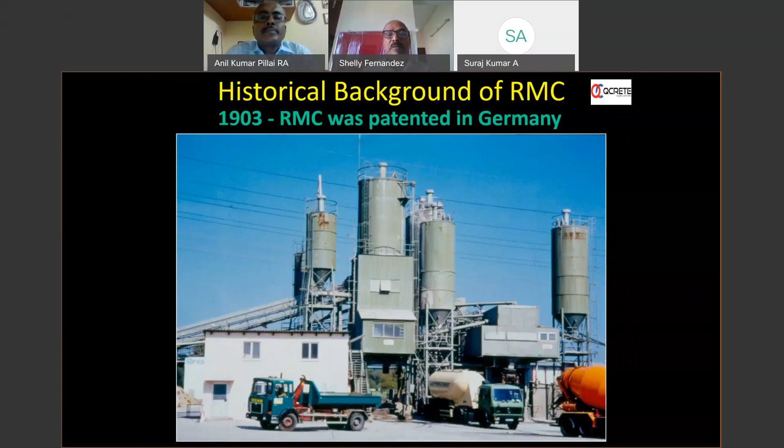Now, the historical background of RMC. In 1903, RMC was patented in Germany. Germany was the first country which got the patent for producing ready-mix concrete. That's why most of the equipment used even in India is basically manufactured in Germany. In 1913, the first ready-mix concrete was mixed off-site and delivered to a construction site in Baltimore, USA.

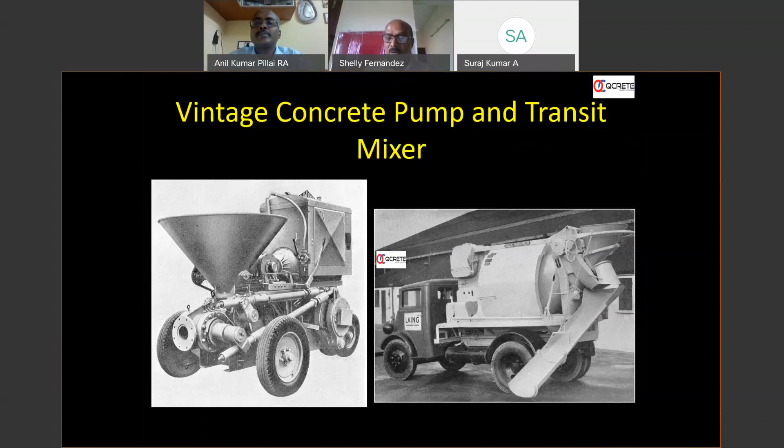In 1926, the transit mixer was first used. In 1930, the first RMC plant was established in the UK. And the first specification of RMC was published in the USA in 1933. Now you can see a vintage concrete pump and transit mixers used during those times. And recently you must have seen our pumps and transit mixers commonly moving up and down on Indian roads. From this stage to this stage, a lot of development has taken place in the ready-mix industry.

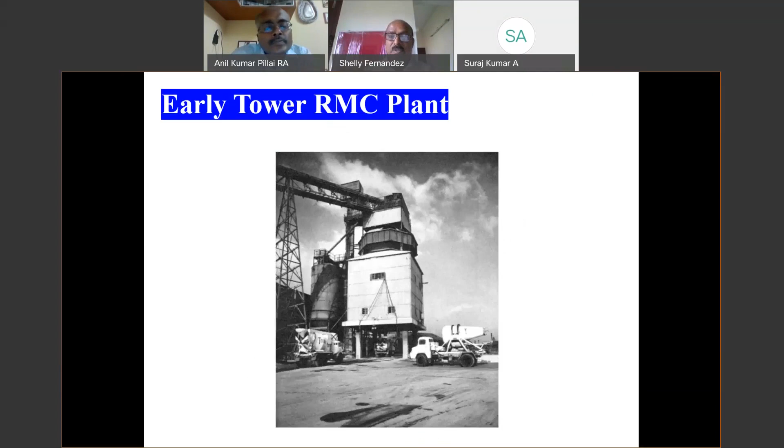Now you can see this was the early tower RMC plant. All your aggregates, cement, everything got loaded into this tower, and at the bottom you can see the transit mixers standing there, loading the concrete to be taken to the sites. These are early transit mixers. Now we have one more type of transit mixer which was used in those days.

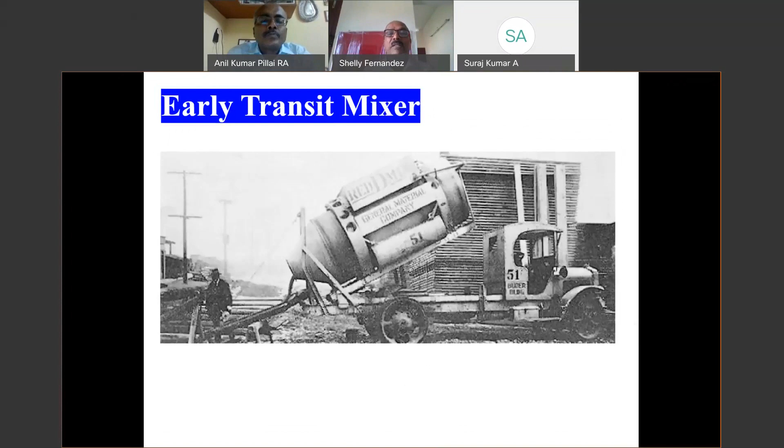Now, a background about RMC: from 1960 to 1980, there was a phenomenal growth of RMC. That is, in USA, around 31 million cubic meters was being done through ready-mix. Actually, around 1990 the USA had around 3,700 plants utilizing 75% of the cement consumption actually.

Right now, we can say around 6,000 RMC plants are in use in USA, and in most of the developed countries we can say 85 to 90% of the cement consumed for concrete is being moved through ready-mix concrete actually, whereas India has not come up to that stage actually. We are only at a penetration level of 15% actually.

So we started the RMC plant in India. The first plants used in India were for major dam construction sites like Bhakra Nangal, Koyna. These were the first sites where we had used the ready-mix plant. The first standard on RMC was published in 1968 in India. And in 1970, Indian construction firms experienced RMC overseas in the Middle East actually.

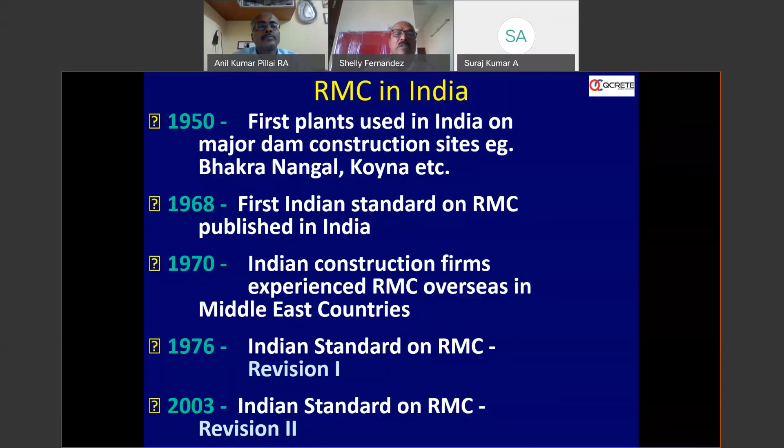And then in 1976, the Indian standard on RMC revision 1 came out. And in 2003, we had the Indian standard on RMC revision 2 actually. Now you can see that in 1979 the RMC concept with pumped concrete was first applied at Tata Power Company, that is the 500 megawatt unit in the Trombay project at Mumbai. This was the first known site where concrete was actually pumped for the construction site actually.

Now, RMC in India: the first commercial plant was set up in Pune. As you know, we have all these taxes which get levied onto the concrete. In those days, it was very, very costly. And when compared to site mix, people definitely went in for comparison and found it very costly, and it couldn't move forward. And then that first commercial plant came to a close.

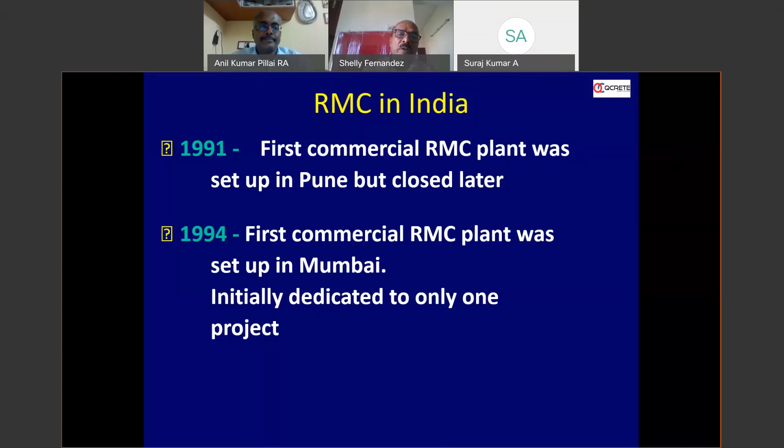Then again, it started in 1994. The first RMC plant was set up in Mumbai. Initially, it was dedicated for a project, but later on, it started with commercial operations actually. So from there, we moved on. Mumbai was the first to start in the commercial sector actually. And today, we have several cities having ready-mix plants.

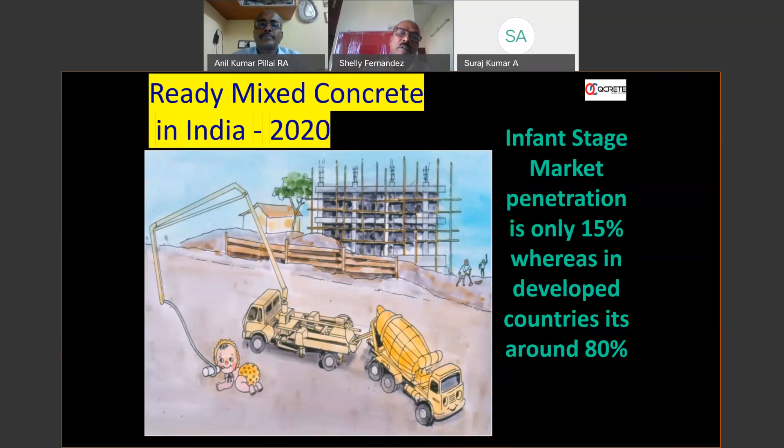Now you can see ready-mix concrete in India, even in 2020, is still in the infant stage actually. We are still in a toddling stage actually. So if we consider the whole of India, the market share is only around 15% penetration in RMC. Whereas in developed countries, it has gone up to 80% actually. So a very long way to go. And a lot of opportunities are there in this particular industry, if the construction professionals take it in a positive way.

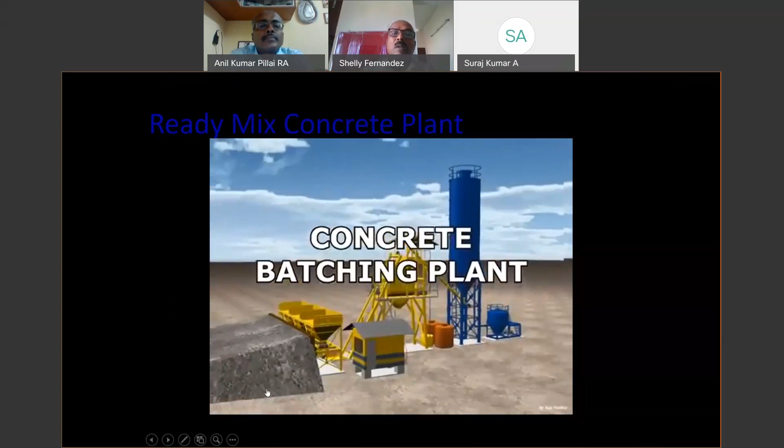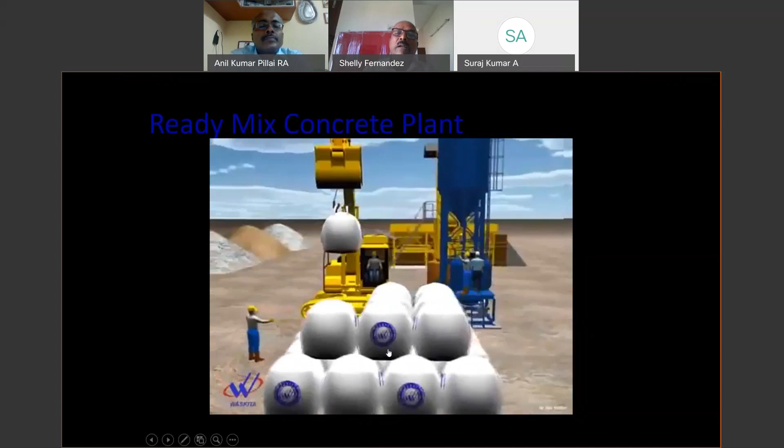So these are basically all the layout. You have the silos, you have the plant erected there. This is a production unit. This is the batch cabin where the production happens. Basically, here the cement is shown in bags, but most of the ready mix nowadays has upgraded, and they use cement bulkers to unload the cement, because it becomes manual operations when we take bags.

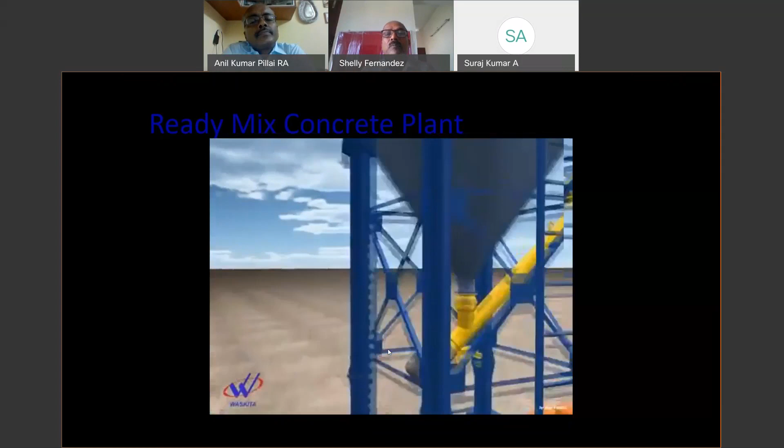So we want to eliminate all the manual operations. Now cement bulkers are available. So cement transfer takes place. It goes into this silo. It is fed into the silo. You can see here the silo is getting filled up with cement.

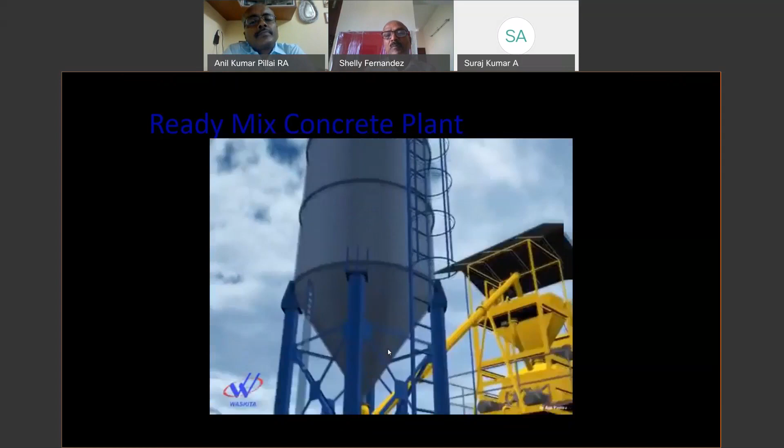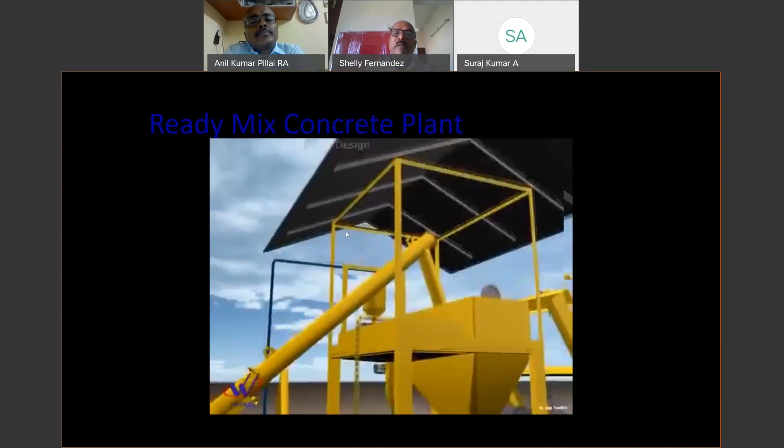Through the screw conveyor, we can show you the operation of the screw. The screw conveyor loads the cement into the cement hopper, or these admixture and water is being loaded into the pan mixers. These additive tanks, admixtures. It is loaded into the dispenser, and through that, by weight, it goes into the pan mixer.

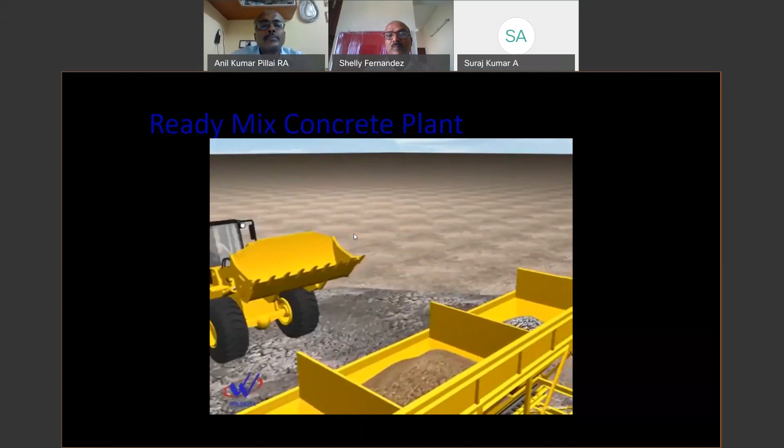All materials are weighed by weight, and through weight only it goes into the pan mixer, as per the mix design, as per the designed mix concrete. So you can see here it is loaded into 4 different types of bins through JCBs. Through weight, the aggregates are weighed and taken onto the conveyor belt. It is weighed and it is shifted through conveyor belt.

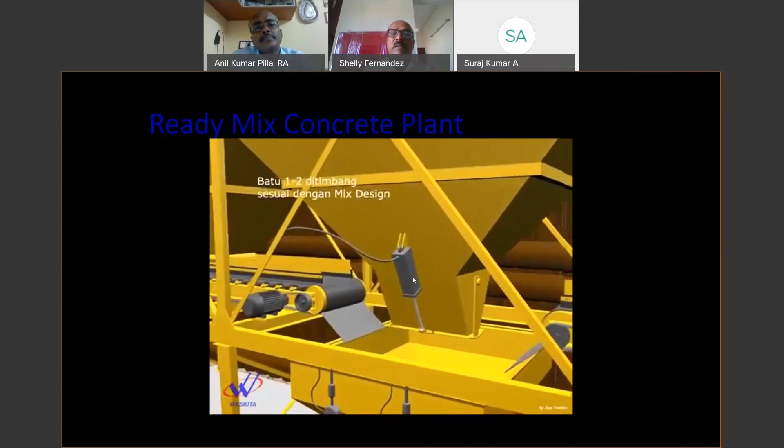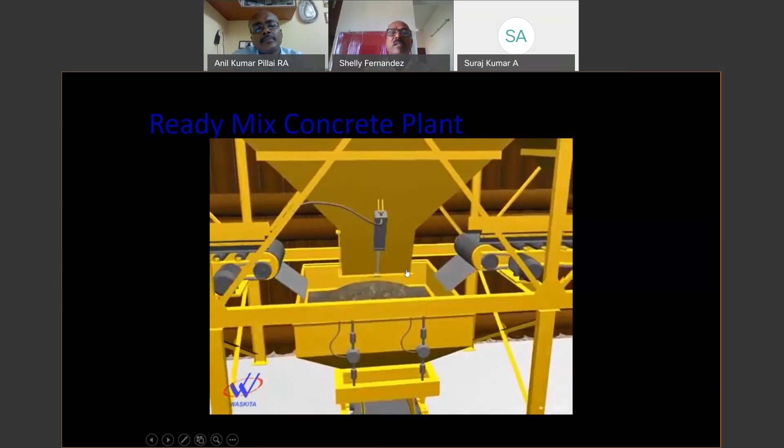These are the weighing scales. Right? These weigh and then release that much as per the mix design. So they are all automatic. There are all load cells. There are load cells through which it weighs. And it goes into the hopper, and this hopper is where it is loaded onto the pan mixer.

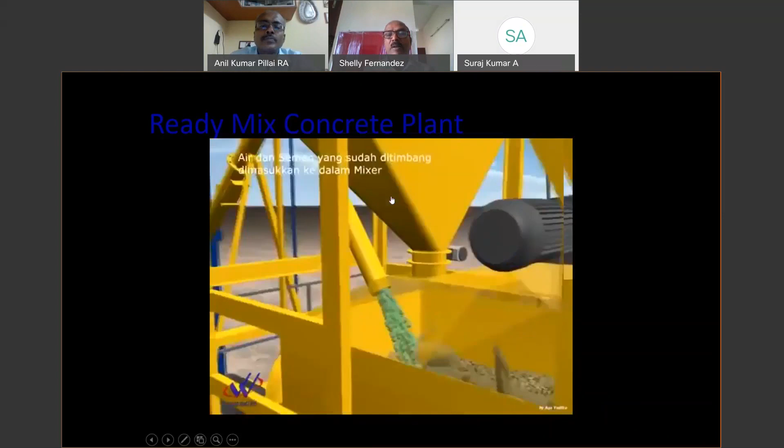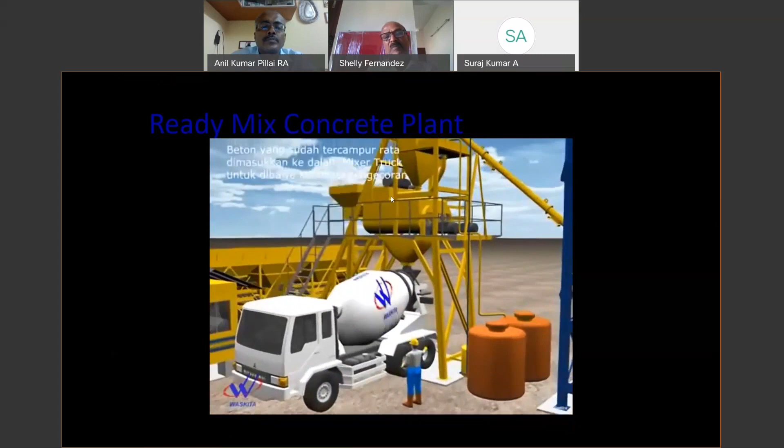Now this is a pan mixer where all materials go inside. It's a vertical shaft mixer. And the finished product, we are getting onto the transit mixers. So you can see this brief process which is taking place for producing concrete in a concrete plant.

Now, these are the screw. We can say that loading and unloading, discharging takes place through this screw conveyor. Whether it is in transit mixer, we can load the concrete, we can unload the concrete. This is simple. We all know how it works. And also the screw is used for loading cement into the cement hopper.

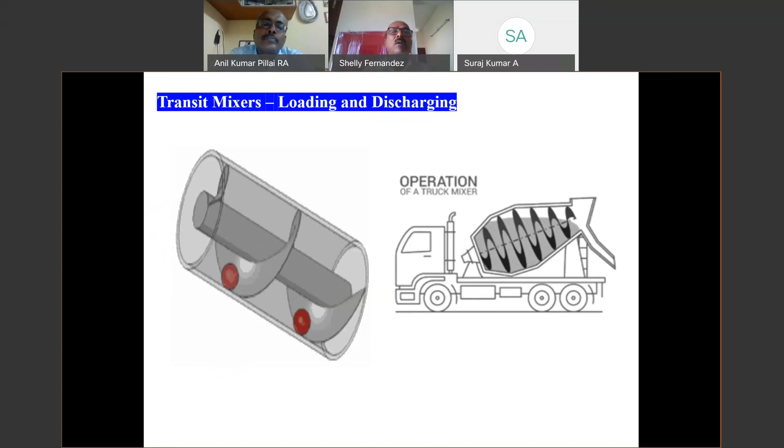Now, why should we use ready mix concrete? The best part is that the concrete materials are batched accurately and mixed efficiently, resulting in superior quality. Because depending on the type of aggregates, the materials are tested, and then a proper mix design is done at the concrete lab, and for each customer it is fed into the computers, microprocessor control, and the batcher, the production officer, sits here.

He controls, he puts this in where each material is weighed and sent. As you saw, all the materials are being weighed and sent for producing the concrete. And these mixers we are using are high quality mixers. Earlier, in the mixer machine at site, you can see it is a drum moving. Now here we can see the blade rotates at a very high speed.

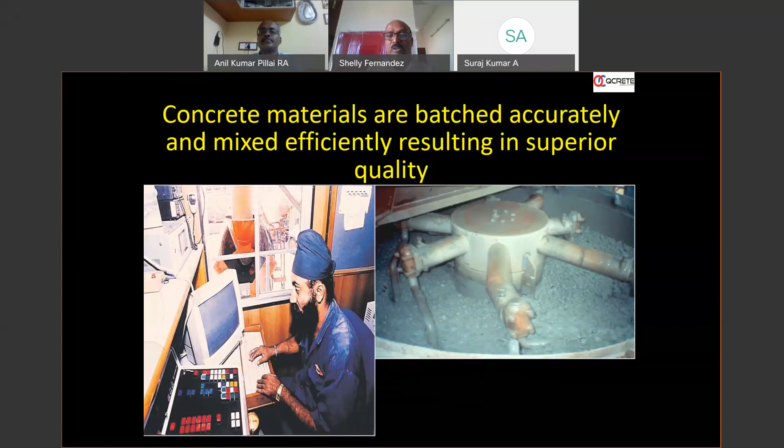Now here, not only cement, aggregate, admixture, if any finer materials have to be added, like for making higher grade concrete, we have to add microsilica or alcofine. That also gets mixed very well. So you get superior batching resulting in superior quality. Now it is faster speed of construction.

We have different types of plants available here. Mostly for commercial production, we have this 60 cubic meter per hour production capacity. So 60 cubic meter concrete can be produced in an hour. That is the capacity it says, but due to some constraints, for 60 cubic meter, we can produce around 36 to 40 cubic meter of concrete in an hour.

So roughly 300 cubic meter can be produced in 10 hours. We start at 6 and we end at around 4 o'clock or 6 o'clock, we'll be producing around 300 cubic meter of concrete. So moisture corrections are done accurately, hence water cement ratio can be accurately controlled. So again, there are no manual additions.

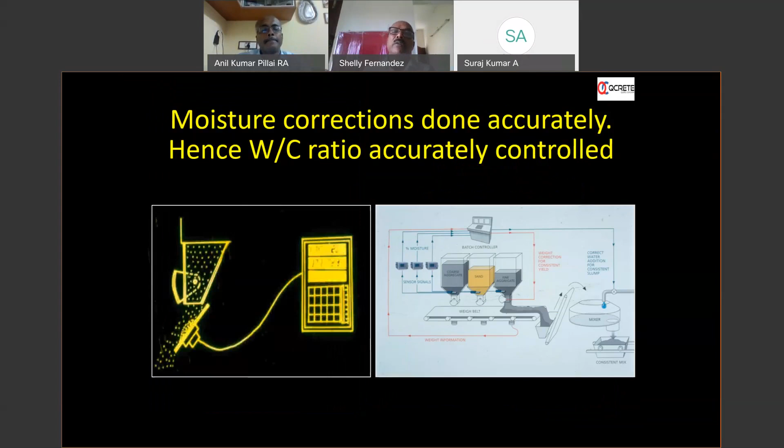Everything is, even in the aggregates, nowadays we have this moisture meter, where the aggregates, when it's falling itself, will find out what is the moisture in the aggregates, and that much water gets reduced from the water cement ratio, and hence you can get proper control in water cement ratio.

Now you can see again it improves housekeeping at construction sites. Most of the construction sites, whether small or big, we very rarely find space for storing aggregate, cement, and due to which a lot of issues happen when doing the concreting; on the day of concreting, neighboring issues will be there.

So with the coming of ready mix concrete, everything is mixed at the plant and it is brought here. Only the pumping operation takes place at site. So you have to only have the space where to keep the pump, and all your steel reinforcement or your shuttering can be well stacked and your housekeeping improves.

Now, material planning and its availability is not a concern, because labor requirement reduced considerably. At site, the site management need not have too much of a headache for, suppose, a 100 cubic meter job or 200 cubic meter job. Earlier, we all used to go find out the labors, whether the labors are there in right numbers.

Not too many labors coming to the site. Again, it is not good for the construction when they move over the steel reinforcement. So all these headaches have been reduced. Only a few workers will be there on the top who will be used for pumping concrete and placing the concrete.

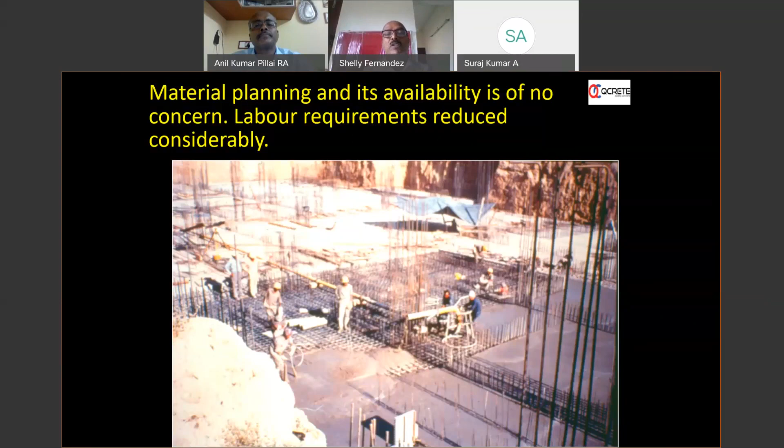Now we have chemical and mineral admixtures added accurately and properly dispersed in the concrete mix. So we need not worry too much. It is all automatic, it is weighed; it is a dispenser unit which is placed in the concrete plant, and it will accurately measure it and it goes into the concrete mix.

Again, most important, it creates less environmental pollution. Since all your ready mix is being placed at a location where it is an industry or it is approved by the pollution board, only there can we set up the ready mix plant, and all the pollution is restrained to that plant area, not at the site.

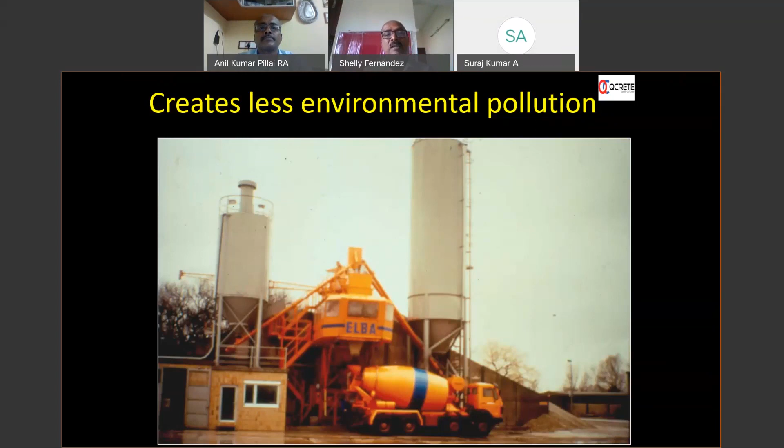Otherwise, in every small nook and corner, if somebody is standing with a mixer machine, there will be aggregates coming and sand coming, and nowadays we don't have natural sand also, so we have to bring M sand there. You can see a lot of pollution happening in and around the neighborhood. So now that has been restrained with the coming of ready mix plants.

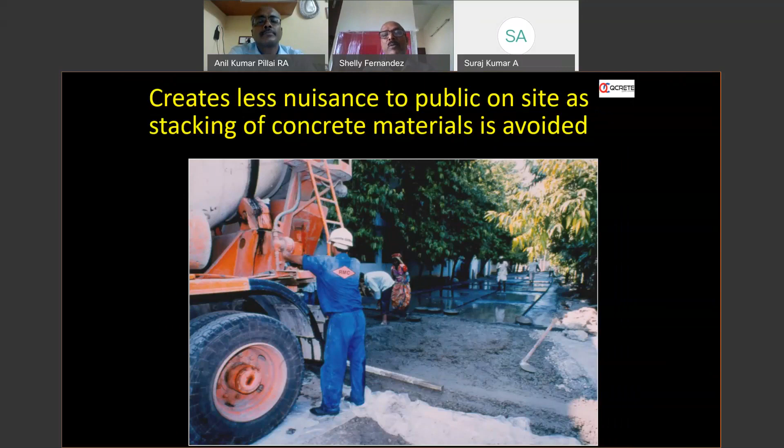Again, it creates less nuisance to the public as stacking of concrete material at site is avoided. As I told you earlier, only the finished product is coming there, which is wet, and hence it gets unloaded without any pollution to any of the neighboring people, and less nuisance is created to the public.

Now again, it helps encourage new technologies like pump concrete, bulk cement transportation, self-compacting concrete. When the ready-mix plant has come into the picture, engineers can now start thinking of going in for high-grade, high-performance concrete, M60, M70, M80, and even in India we have gone up to M100 concrete. We can think of self-compacting concrete.

We can use different types of materials, like fiber reinforced concrete, or mineral admixtures like GGBS, fly ash, or microsilica. All these things we can think of once this is ready mix. And also the site people need to think of how the concrete is to be pumped, either through tower crane or through a stationary pump or boom pump. All these new technologies are emerging due to the coming of ready mix plants.

Again, we have already experienced that the quality of formwork, scaffolding, and staging automatically improves. When ready mix is first opening in a particular area, we'll see bamboos being used and pulleys being used for your formwork. But slowly, you can see the change over a period of time.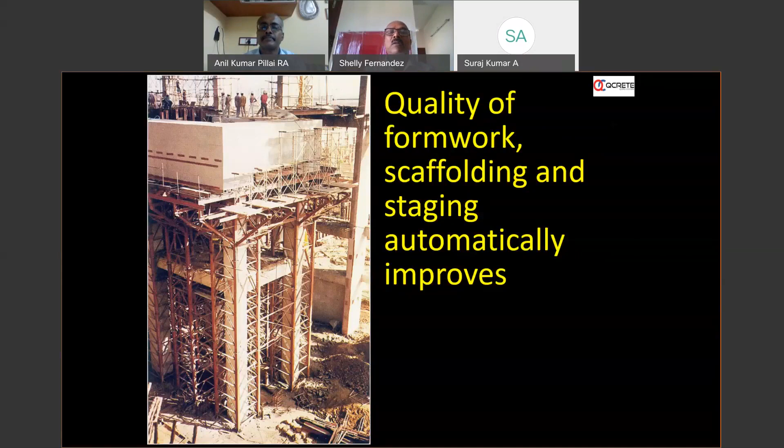People start changing over to steel shuttering; the scaffolding, staging, everything improves because people are now turning towards ready mix. When it turns towards ready mix, the older formwork systems will not work. So they change to superior quality formwork.

Again, workability and cohesiveness of the concrete mix improves to suit the pumpability requirement. This is what we had seen. Otherwise, your concrete pump will not accept the concrete. It will choke. It will not pump. So to suit the pumpability requirements, automatically the ready mix player has to go in for a good workable and cohesive mix.

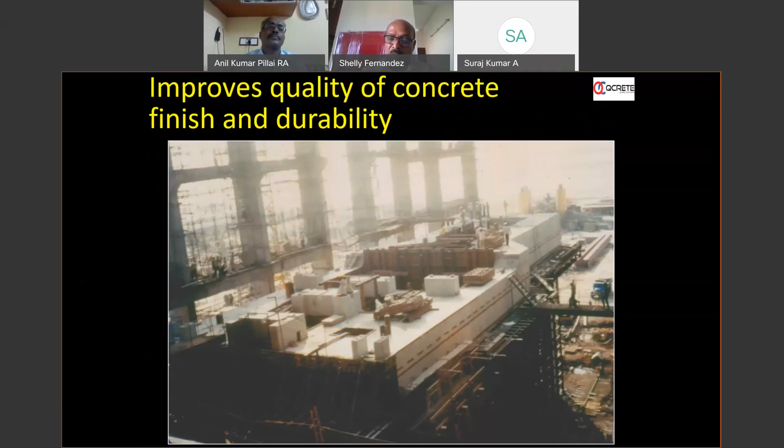Now again, quality of concrete, finish and durability improve with the coming of ready mix concrete. So what are the checks needed for shortlisting a ready mix concrete supplier? This is a very important topic because since this industry doesn't require too much capex, we can see a lot of players coming into it. Just like the real estate industry, anybody gets into the business. This business looks very lucrative, so people who don't have much concrete knowledge also get into it.

Sometimes even the aggregate industry, which is in a very raw state, people don't much understand how to produce quality concrete, quality aggregates. They think it is easy for them to put up a ready mix concrete plant, and then they jump into this industry. Later on they find that it is purely a technical material, and just adding cement to their aggregates will not produce concrete. Concrete is basically a technical product, and technical expertise should be there to produce good quality concrete.

So the consumers need to check before giving the concrete order to a ready mix company. So what are the checks? I'll just list them. The first, I feel, is that all consumers, whether it is 100 cubic meters or 15 cubic meters, can visit the ready mix plant and find out whether the ready mix company has their own quality management system, and whether top management is committed to quality of production, quality of concrete produced, and their services.

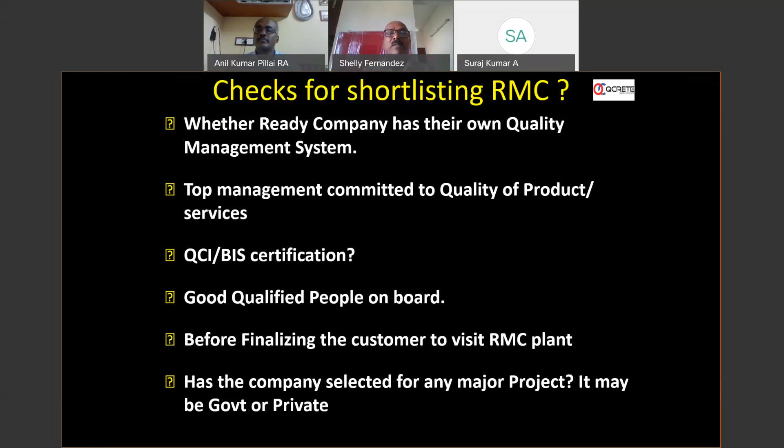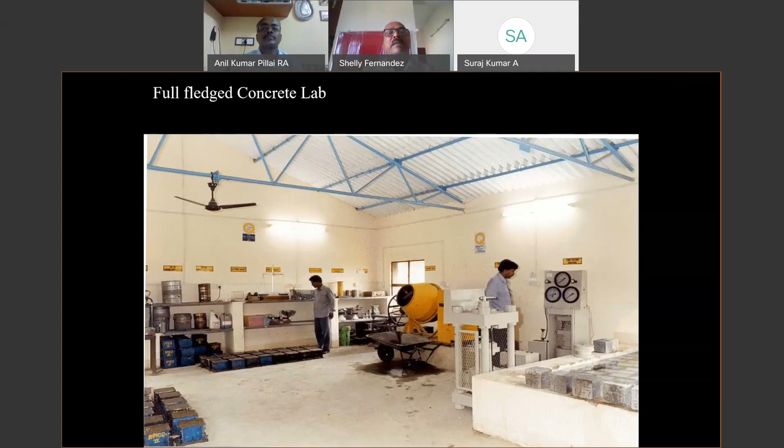When you visit the plant, you can see whether the company has a full-fledged laboratory to check all the quality parameters, raw material checking or concrete at the hardened stage, and whether sufficient equipment is available. Most labs have a compressive testing machine, but nobody checks whether it is regularly calibrated through the NCCBM proving ring. Every 6 months it has to be calibrated and the certificate placed behind the compressive testing machine. Otherwise the results will vary, giving very high or poor results. So these checks should be done.

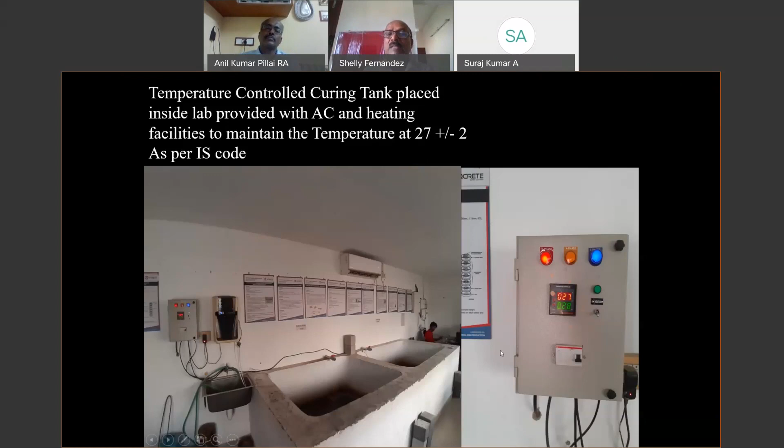An accelerated curing tank facility: after doing a mix design, if the consumer wants results in a day, that can be done through the accelerated curing tank. Whether the curing tank is placed inside the laboratory to maintain the temperature, because the code says cubes should be cured at 27 plus minus 2 degrees centigrade. We have a temperature gauge and an AC. There is also a water heater inside the tank; if the water temperature goes below 27 degrees, it automatically heats the water, and beyond that it cuts off. Consumers should check whether these arrangements are followed in the ready mix plants.

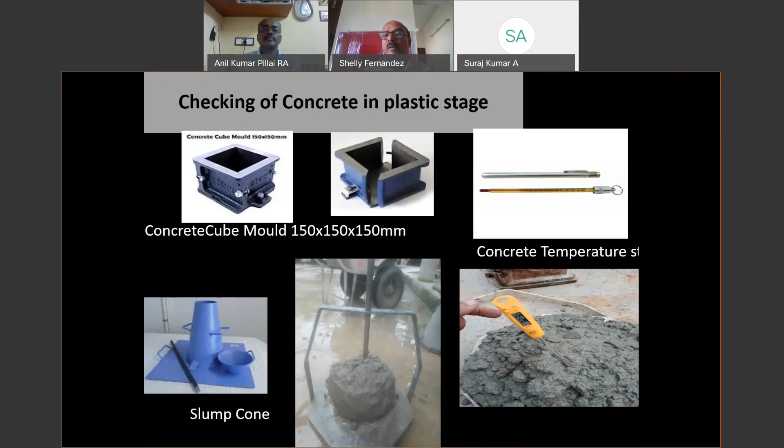Now all the aggregates, all the materials which are received in a ready mix plant, are weighed through a weighbridge, and at that weighbridge itself the samples are collected by our quality person. He's standing there on top of the tipper, collecting the samples, and these samples are tested to check whether they match the original sample which the supplier had given to us.

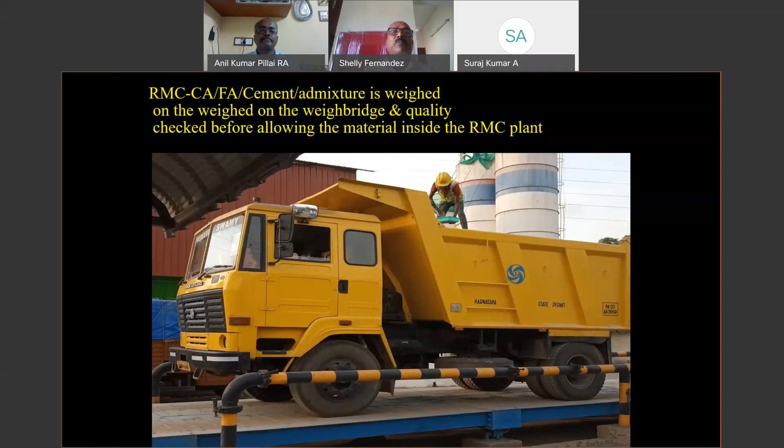Now, if you go to visit a ready mix plant, see if there is proper upkeep. Does the organization ensure upkeep and cleanliness are maintained in the plant? Is the housekeeping proper? If the housekeeping itself is not proper, then it is not an organized player. There itself you can reject that plant; you need not take the concrete, because the concrete will not be of proper quality.

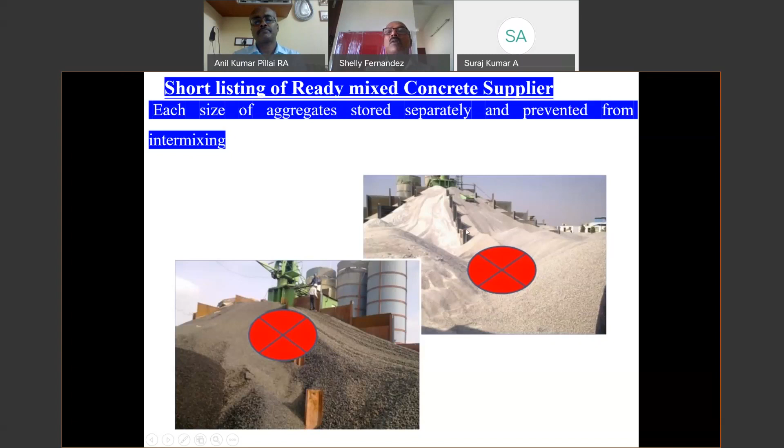Now you can see here each size of the aggregate. Suppose it is a star bin type of ready mix where the supplier has loaded aggregate and sand up to the brim, and intermixing is taking place between the aggregates. This is 12mm aggregate, this is 20mm aggregate, and they are getting intermixed. So what is the use of going for a mix design when the aggregates, or sand and aggregates, are getting mixed here? These are to be prevented. These are some of the things which can be checked.

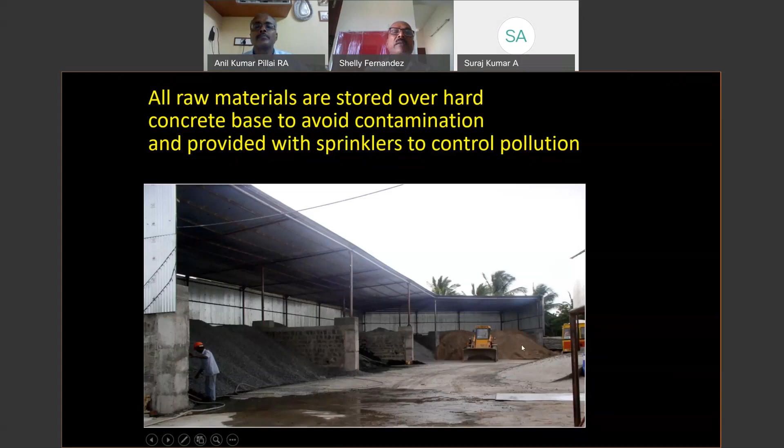Again, admixtures: sometimes we see that admixtures are stored in the open. They need to be properly covered. Some companies have barrels where they load the admixtures, and these have to be properly covered on top. There should not be too much sunlight hitting the admixtures. Some places go for steel silo-type containers where they store the admixtures.

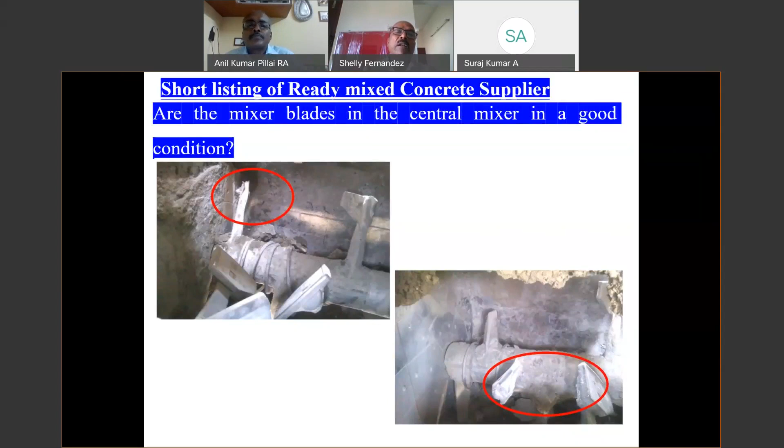Now, are the mixer blades in the central mixer in good condition? Is regular maintenance being done? Even this will affect the quality of concrete. The company may be very good, but if they are not doing proper and regular maintenance, that will affect the quality of concrete.

Now you can see here the central mixer maintenance, whether it is clean. After every job, or whenever a 15-20 minute gap is available between loading one transit mixer and the next, the mixer has to be washed. Then there will not be any build-up. As you know, concrete sets, and once it sets it becomes very difficult; it has to be chipped out. So proper washing should be done if there is a gap of 15 to 20 minutes between vehicles, and at the end of the day all the stuck concrete particles have to be chipped off. Efficient cleaning is very much required to produce good quality concrete.

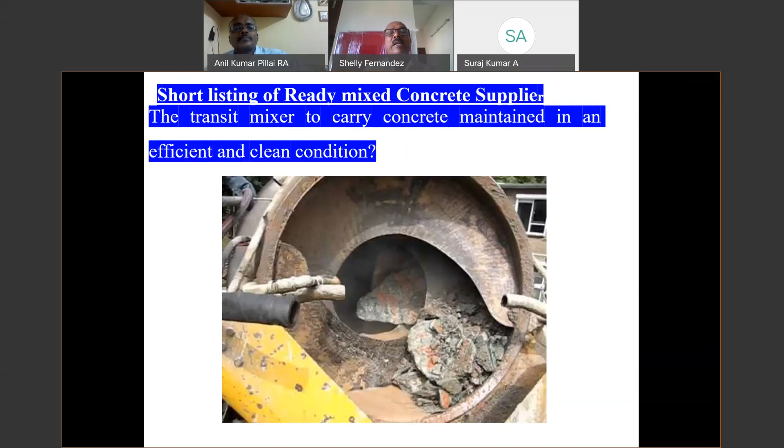Now even the transit mixers which are plying, if they are not properly maintained and cleaned, will also cause segregation in your concrete. Again, for the batching plant, check whether calibration is taking place regularly: every month for the aggregates, and every week for the admixtures, cement and water.

If proper calibration is being done, then we can say that the company is producing a good quality. Then as per the IS check, frequency is given there, whether they are following it up. Once they did it, they have to put it on the batch cabin when it has been done, all this calibration report. They can ask for the calibration report. As a consumer, you can ask when it has been last calibrated. If the company is regularly calibrating it, definitely you are going to get a good quality and correct quantity of concrete.

Then why to use RMC? RMC, again, we can say wastage of concrete materials can be avoided. We have all experienced site mixed concrete. When we do site mixed concrete, we see a lot of aggregates, a lot of cement, all this gets wasted. That can be avoided. Temperature control of concrete is easier in both cold and hot weather conditions.

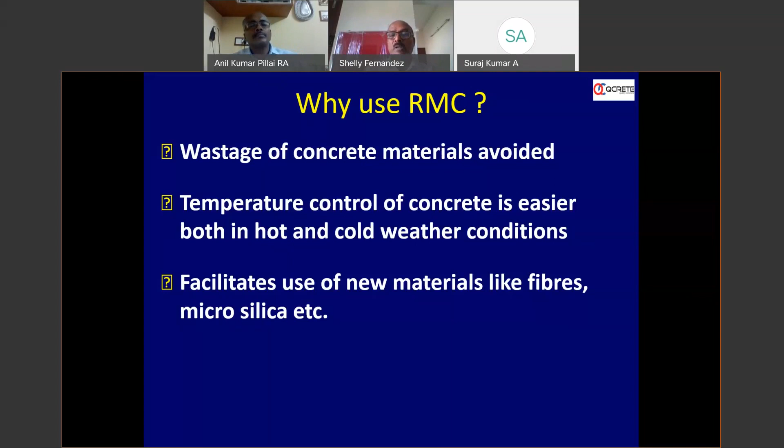So you can specify your concrete saying that, okay, I want concrete at my site at 25 degrees centigrade. The operator or the concrete producer will work on it and give you a concrete which will be 25 degrees at site. So these are things which the engineers can specify. Then facilities for use of new materials like fibers, microsilica, GGBS, fly ash, all these things we can use to produce durable and quality concrete, or high performance concrete.

Does the ready mix, RMC, always assure you a quality of concrete? It is not necessary. There are basically a lot of factors. It is a good combination between the RMC producer and the engineers who receive the concrete at site. And what is the site condition? What type of concrete is to be ordered? So it all depends on all these factors to produce quality concrete at site.

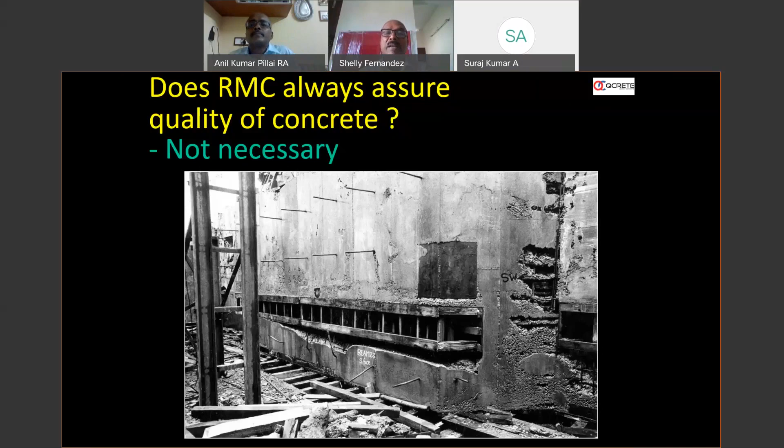So I'll be just running through some of the things, like what checks are necessary, like specifying the concrete requirement correctly. That is one of the things which is most lacking. The first is what strength or grade of concrete is required. That is most important. When you are ordering a concrete, it is to be very much specified what strength or grade of concrete is required. Then the next requirement is workability required at site, which most of the people forget.

Allowing for slump variations as per the IS code, plus minus 25 variation is allowed depending on what type of slump is required. Suppose if you have medium work, your reinforcement is medium, then we can go in for a workability like 100 plus minus 25 you can order. So if the supplier is supplying it at 125, it is acceptable, or minus 25 also it is acceptable. That is 75 to 125 is acceptable.

Now if congested reinforcement is there at site, then the site engineer should think what workability is required, whether my 100 mm will be sufficient when it comes to the site. So depending on the congestion, depending on the type of reinforcement at site, you should specify the workability. Then durability requirements such as water cement ratio, minimum and maximum cement contents, special additions. These all have to be very clearly specified when you are ordering your concrete.

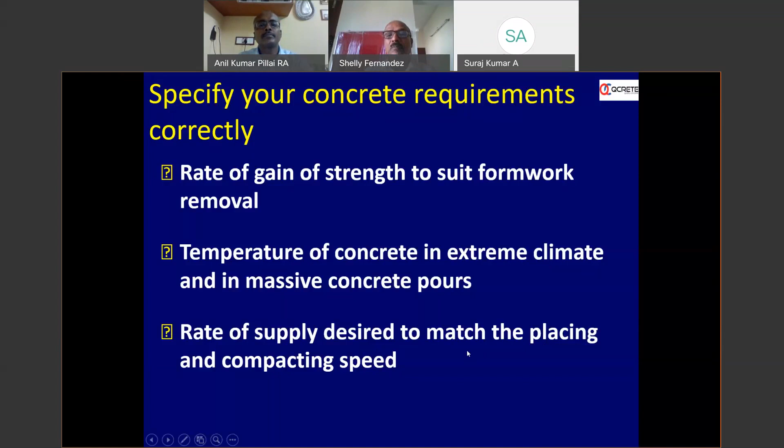Then temperature of concrete in extreme climates and massive concrete pours. Then rate of supply desired to match the placing and compacting speed. So these are some of the things depending on which you have to specify and order your concrete. Then type of finish required, lift and lead of concrete, transportation, placing at site.

So as I told you earlier, you check the following: calibration of all measuring devices of an RMC plant, the reliability of the plant for a consistent, continuous concrete supply, quality and proportion of materials used, and compliance with the specification of concrete. As I had told earlier how to choose that from the customer side also, all these measures need to be checked.

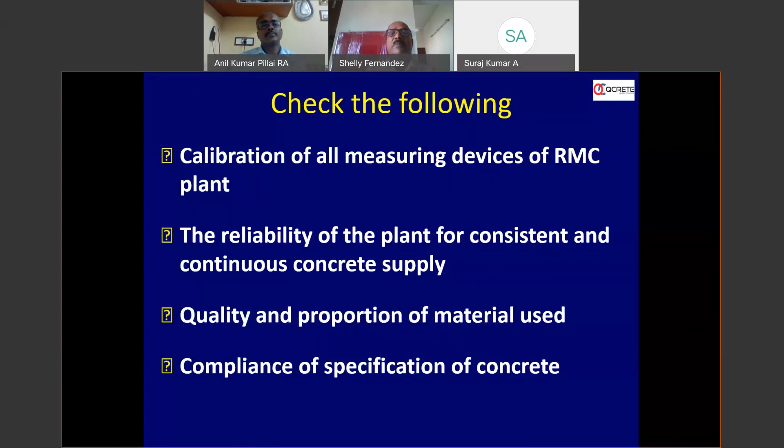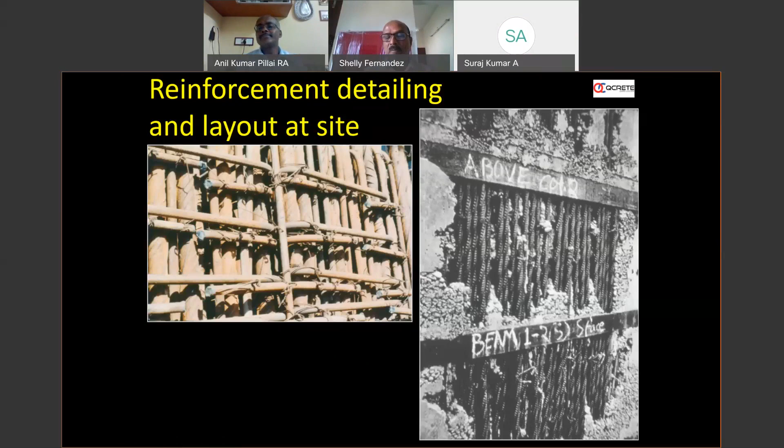Here you can see this is a congested reinforcement. People should understand that. It should go in for a higher workable concrete for all the concrete to be placed properly inside the formwork. Then adequacy of formwork to cater to the speed of supply and lift of placing. So depending on the type of formwork you have used and at what rate you require the concrete to reach your site, according to that you have to order the concrete.

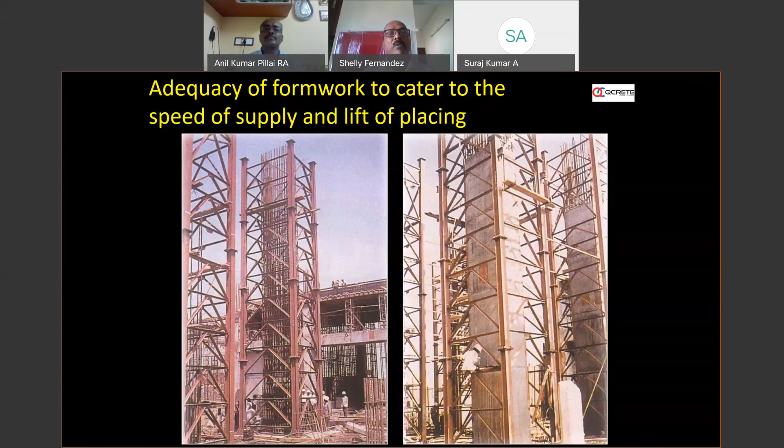Then adequacy of placing equipment and manpower. So suppose a mass concrete pour is happening. We have all the boom pumps there. We have a number of transit mixers feeding it. All that is there. But if your number of workers for compacting, placing and finishing concrete is not sufficient, then there is no use of placing so many equipments and so many transit mixers to do the pour. So you have to have the equipment, the proper number of vibrators. You should have the proper manpower to match the concrete being supplied.

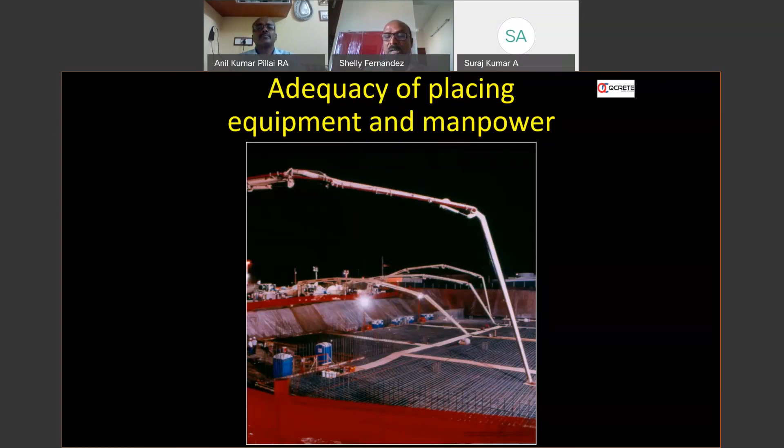In some places when we go with our ready mix plant, the contractor may have only 1 or 2 vibrators, and when we start the concreting, one vibrator conks off, and after some time the next one also conks off. Then the ready mix concrete in the trucks stands there for a number of hours, and after 3 or 3.5 hours, if the contractor is not able to arrange suitable vibrators, the concrete gets rejected. So the contractor should see that all the compacting and curing arrangements are in place in sufficient number, so that such issues where the concrete has to be rejected are not faced.

Then what are the checks needed at site during the concreting? What checks are required by the site engineers? Before the start of production, they can visit the plant to see whether adequate materials are stored by the ready mix player, whether they have sufficient equipment, sufficient transit mixers or standby pumps, in case the pump placed at the site conks off, and whether all the materials are available in the plant to complete the job. Mainly it is for bigger mass concrete work.

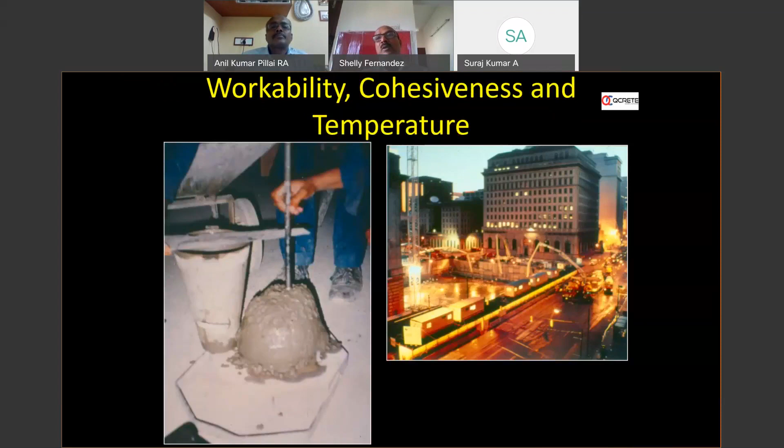Then whether the concrete coming to site has the workability you specified. Are you getting that workability? Suppose you ordered 100 mm; as I told you earlier, plus minus 25 is allowed as per the IS code. We cannot say that exactly 100 mm workable concrete only should be given by the operator. There is a plus minus 25 from the value at which you placed the order.

That is, if you are given an order for 100 mm workability, it can vary from 75 to 125, for which there will not be any rejections. Then whether the concrete produced by the operator is cohesive or not, just by seeing it you can see the entire workable concrete is covered with cement paste and a proper true slump is there, and the temperature of concrete can also be measured here before pouring into the structure.

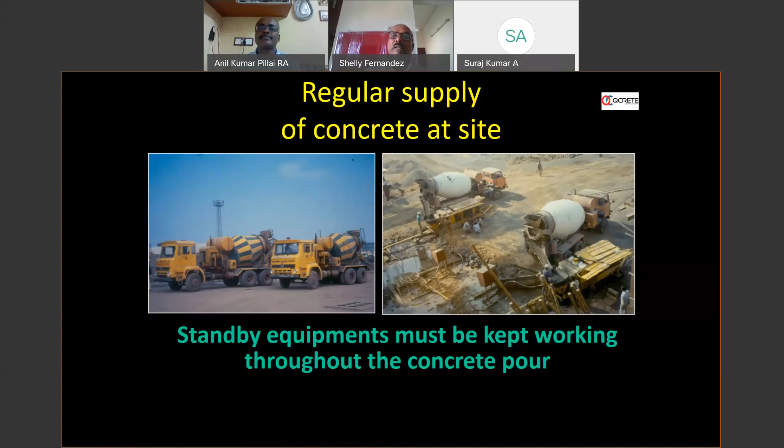Then regular supply of concrete at site: whether sufficient transit mixers are there, whether all the transit mixers are coming one after another and you are getting regular concrete. It should match the speed of work at the site. Then standby equipment: if it is a major pour, we can ask for a standby pump to be placed at site in ready position. And also you should check whether the standby equipment is working or not. Just keeping it is not okay, because if the main pump goes under maintenance, the standby equipment should work.

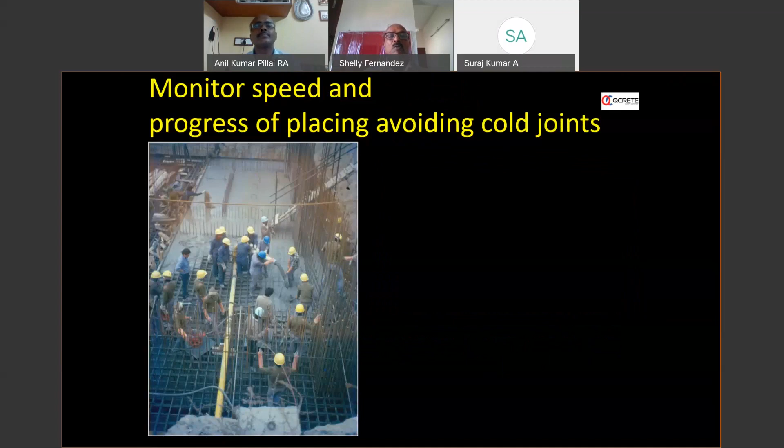Then monitor the speed and progress of placing, avoiding cold joints. So you know that placing plays a very important role. It should be designed in such a way that there should not be any cold joints. It should avoid cold joints happening.

Now, incorrect placing causes segregation. We can see it is falling onto the steel reinforcement and it is segregating. Even though you had made a very good concrete, if placing is not proper or not planned, whatever good concrete you had made gets segregated, because you can see all the fines are sticking on the steel reinforcement and only the coarser aggregates are falling down. So you can see here it is segregating more. It is falling on the steel reinforcement. It is now falling more onto the pedestal. It is segregating further.

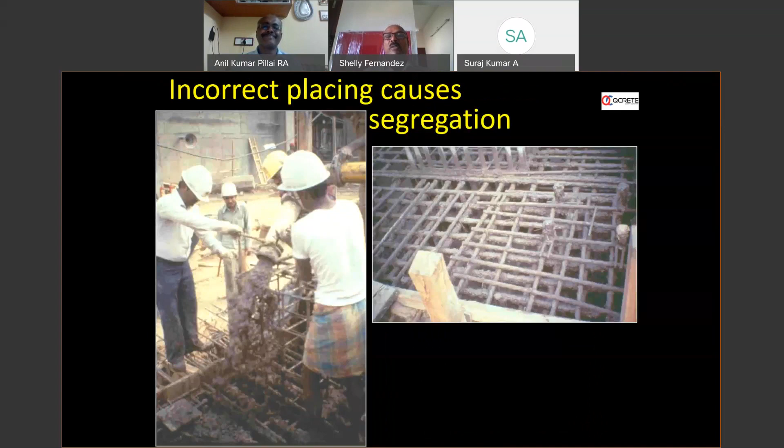Now if you see, at the end of the job, it is mortar coated steel reinforcement. It is not epoxy coated. It is mortar coated reinforcement, a bad job. This incorrect placing will lead to honeycombs.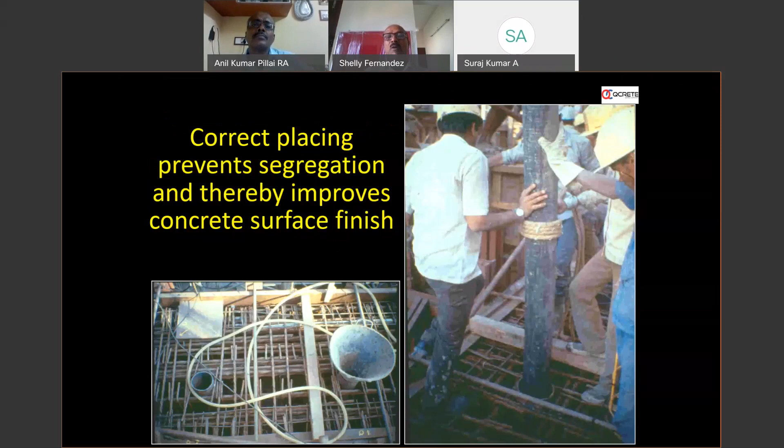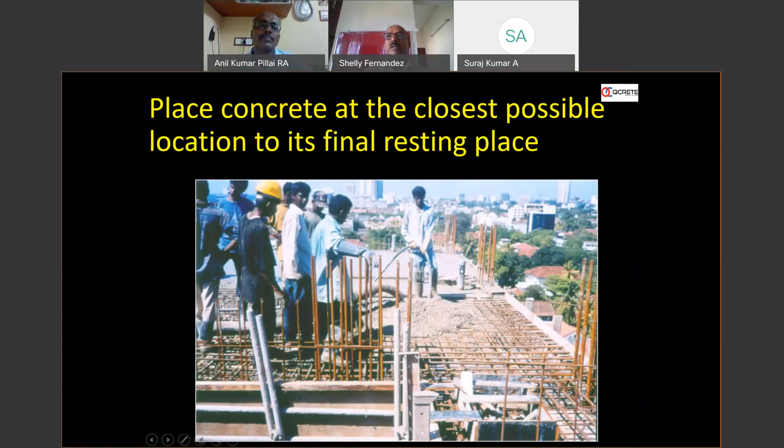So correct placing also plays a very important role. If you place it properly, you can see, we had the tremie pipe for deep foundations with a funnel there, and the chute, the trunk, gets attached to the funnel, and then concrete goes below without much hitting onto the steel reinforcement, without segregation. A cohesive concrete is placed at the required location. So placing concrete at the closest possible location to its final resting place is more important.

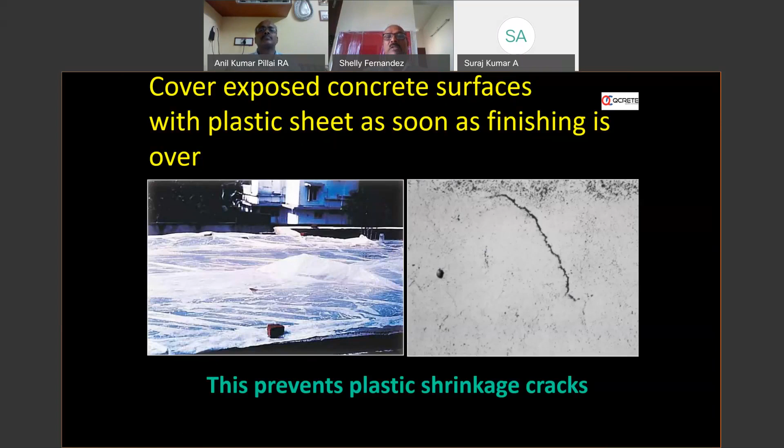Again, you can remove all by proper compaction. That's why you have to have sufficient vibrators at site to do proper compaction. And then covering it with plastic sheets: when we go for ready-mix concrete, it is different from site mix concrete. For site mix concrete the rate of concreting is very low. We keep on finishing it, so we are disturbing the cracks, so there will not be any cracks appearing on it. But for ready-mix, we finish the job in 2 or 3 hours and we leave. We end up with shrinkage cracks. So best is to cover it with plastic sheet or start early curing by sprinkling water on it. So monitor speed and progress of placing concrete, avoiding cold joints.

So now we come to the next part: problems faced by RMC operators. What are the problems RMC operators are facing? I compare an RMC commercial player to a human being. If it is a good RMC which is standard, following all the quality processes and producing good quality concrete, it can be compared with a good, healthy human being. The first and foremost important is the sales. The air or oxygen the human being consumes is the sales. So we should have sufficient sales, sufficient orders to survive. That is the first one.

The second most important in a commercial operation is, like the blood circulation of the human being, the cash flow. The most important thing is cash flow should be there to produce, as for a human being the blood flow should be there.

The third and most important thing is the brain, that is the technical department or the quality system which is being maintained at the plant. If that system is working, then the RMC player is going to produce quality concrete. If you cut corners and say that some unqualified people are kept at the technical department, then the quality of concrete is a question mark. So I compare the technical department with the brain. That is the most important part required for a human being.

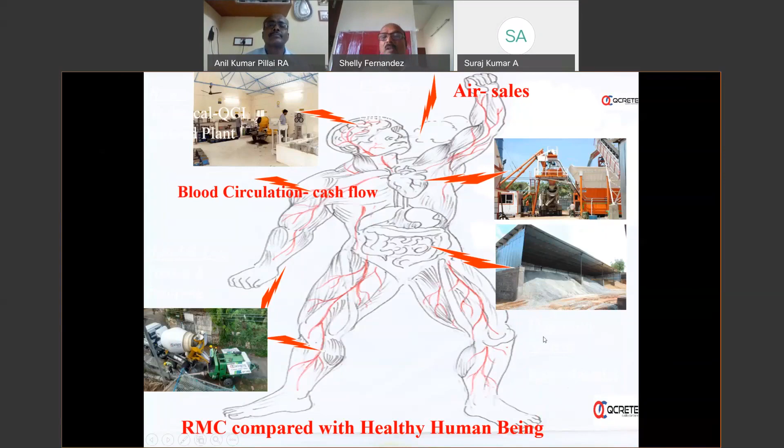So if all things function, like a good healthy human being, it can be compared with a good ready-mix operator. Sometimes they cut corners and don't go in for a good quality engineer at the technical department. The ready-mix company will function, but it will be brain dead. So the consumer should understand which ready-mix player to give the order to.

Problems faced by RMC: market penetration is only 20% even at present. For RMC in Kerala, ready-mix concrete is cheaper than SMC, might be due to high labor cost. Consumers believe that RMC cannot be used for construction of individual houses, that it's meant for big projects. Some contractors mislead consumers about RMC with respect to quality, rate, and materials used in the plant.

Consumers and owners are unaware when giving their work to a labor contractor. Most of the time in small construction for IHBs, they give it to a labor contractor, and all the materials are procured by the owner. They end up with higher cost per cubic meter, because the contractor is not bothered about the losses or wastages happening at the site, since the owner is procuring the material. And even without looking at the loss, comparing apple to apple, ready mix comes out cheaper than site mix concrete.

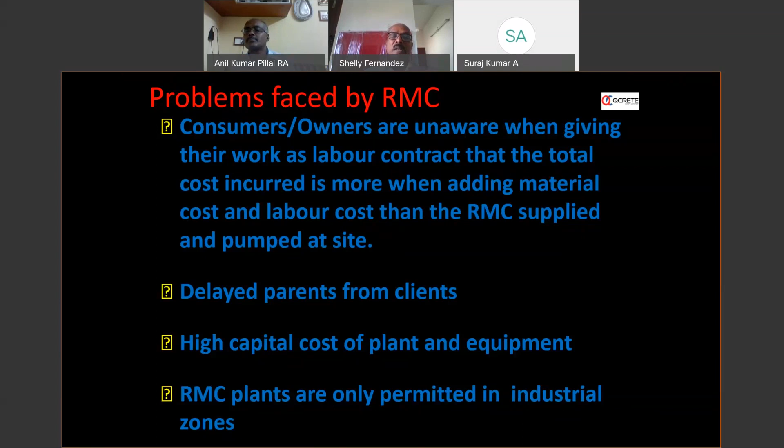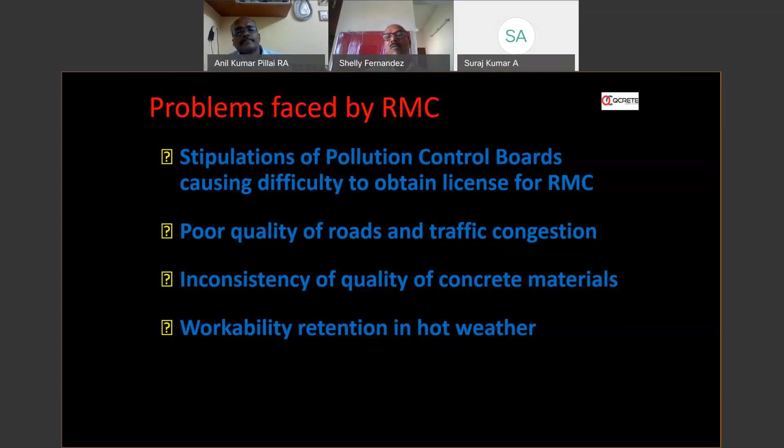Then delayed payment from clients is another factor affecting the ready mix plant. High capital cost of plants and equipment. RMC plants are only permitted in industrial zones. The stipulations of pollution control boards cause difficulty in obtaining licenses for RMC. Then poor quality of roads and traffic congestion, and smaller lanes where transit mixers cannot enter. Inconsistent quality of concrete materials: except for cement, all our aggregates are still a cottage industry, so we find it very difficult to get quality aggregates to produce quality concrete.

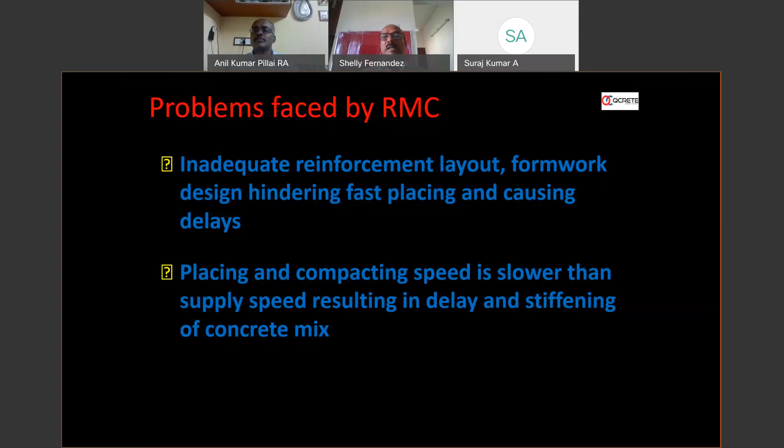Then workability retention in hot weather. Inadequate reinforcement layout and formwork design hindering fast placing and causing delays. Specifications are not properly told, and the formwork is not upgraded to the level to receive the concrete. These are some of the problems we are facing. When the placing and compacting speed is lower than the supply speed, it results in delay and stiffening of the concrete mix.

Coming to problems faced by RMC consumers: there are delays in supplies, because RMC operators may be taking two or three jobs at a time and managing the trucks. They cannot increase the number of trucks, so they manage with the same. So a particular contractor will experience delayed or inconsistent supplies. Then awareness on ready-mix concrete, which ready-mix company to choose with respect to quality, service and cost, and IHB owners under the assumption that SMC is cheaper than RMC. These are some of the consumers' problems we have come across.

Now, let me see the future of RMC in concrete. Infrastructure development will give a great boost to RMC, especially in urban areas. Many strategic bodies like municipal authorities, government agencies and institutions will specify RMC. Now, most of the PWDs, CPWDs or municipalities have still not put in the tenders that concrete is to be taken through RMCs. It has to be specified.

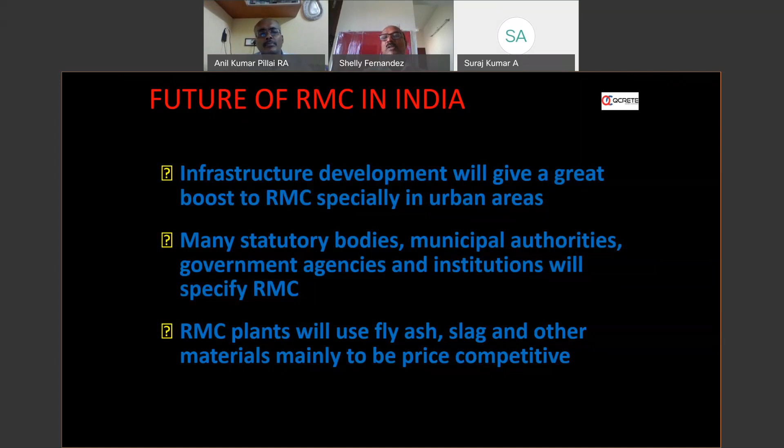Then only the growth of RMC will take place in all cities and villages, in all urban and rural areas also. RMC plants will use fly ash, slag and other materials mainly to be price competitive. So I hope by 2030 in India, with all these precautions taken, with all these specifications coming in, and different bodies taking up the statutory role to specify RMCs, we can see RMC running up and down, whistling and doing concrete all over the place by 2030.

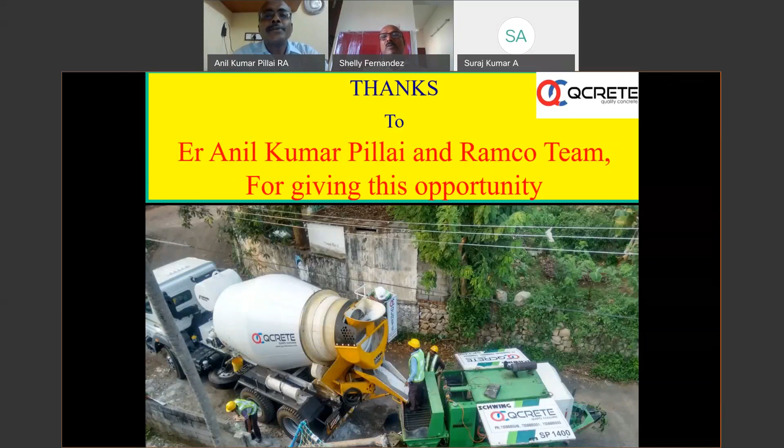In fact, it's always nice to visit fundamentals and at the same time look at the practical issues. You have combined both of them. You have taken us to the history of RMC, to the fundamentals, and at the same time brought every one of us to the practical realities of the problem, both from the consumer's perspective as well as from the manufacturer's perspective, which was a very objective way of looking at the industry itself.

And a very important thing which you have mentioned is the specification of concrete, which many places do not do. They may only confine themselves to the grade of concrete, and that's it. They don't go beyond that. I think that's a very important point that many of them should be looking at.

A couple of questions. Can we take it? Yes, no problem. Yeah, one question which has come is from Calcutta. Yes.

Slump retention is an issue for RMC suppliers. Is high admixture content over 1% advisable? I think this will be covered in detail in the subsequent lectures. But mostly you can go in for PC-based admixtures. In that case, it can be done. With PC-based admixtures, now we have higher quality available.